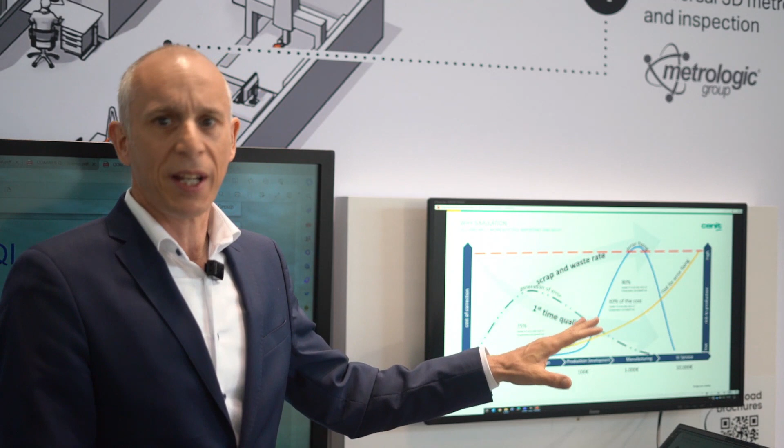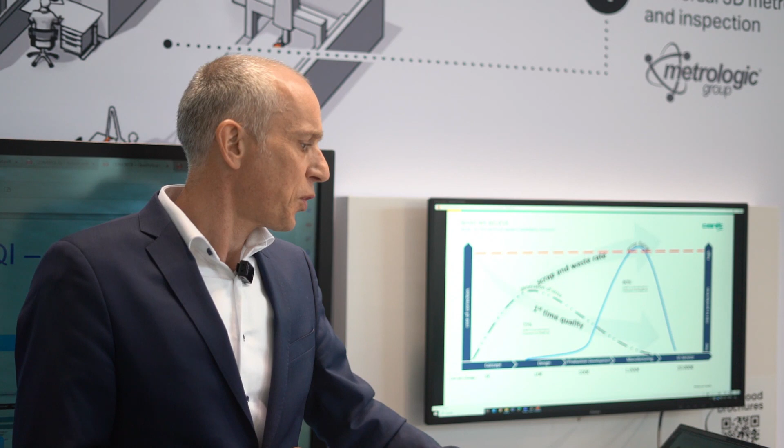And very often when we visit a customer, we find this situation here on the screen where they have a high risk in production due to a huge scrap and waste rate and low first time quality. And this mostly happens when the fixation starts at manufacturing. So how can we turn that around? The point is we have to start the production quite early, and the production I'm talking about is simulation. So therefore, we don't call it tolerance calculation, we call it a virtual or digital prototype.

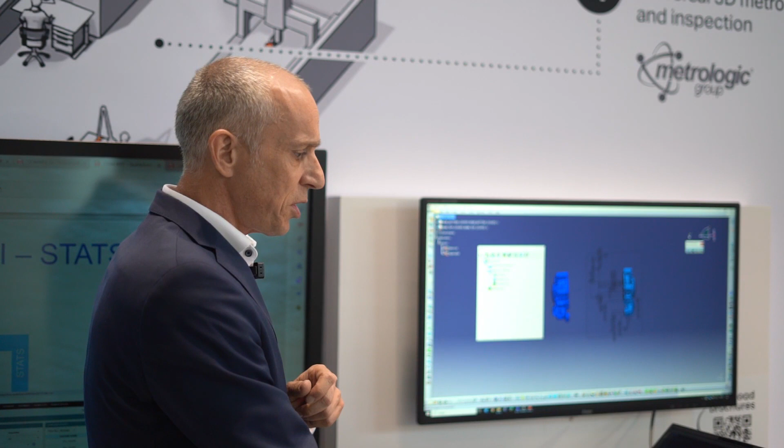Let's have a look at the digital prototype and how easy it is to set up such a simulation. So now we are in the CAD and we have our parts, and inside the parts we have the 3D PMI, but we also have the constraints. So just making one or two clicks to hand over all the things we already created within our CAD tool. So hand over the 3D PMI, but also how the part gets assembled by

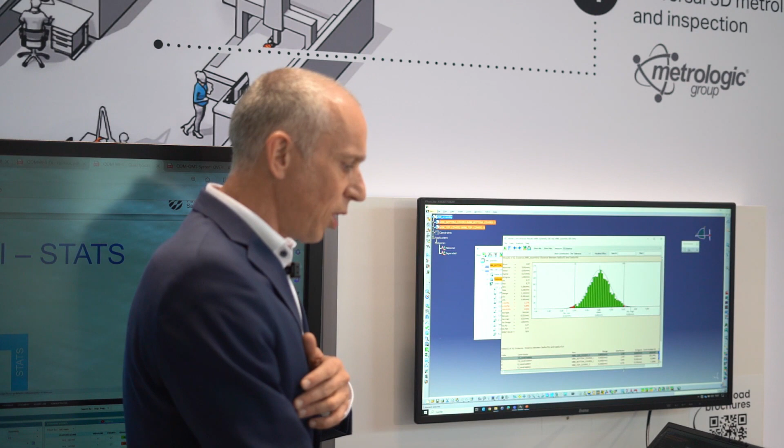the manufacturing. And now we just make a nominal build to assemble that and run the simulation to figure out if the design strategy, the tolerance strategy, the measurement strategy is exactly what we need to secure our quality expectations. And then probably we find out that on our measurement, let me go to the right one, we face some out of specification. And what we also find is what is guilty of that result. So what do we have to change? And it's just by a double click that we can change.

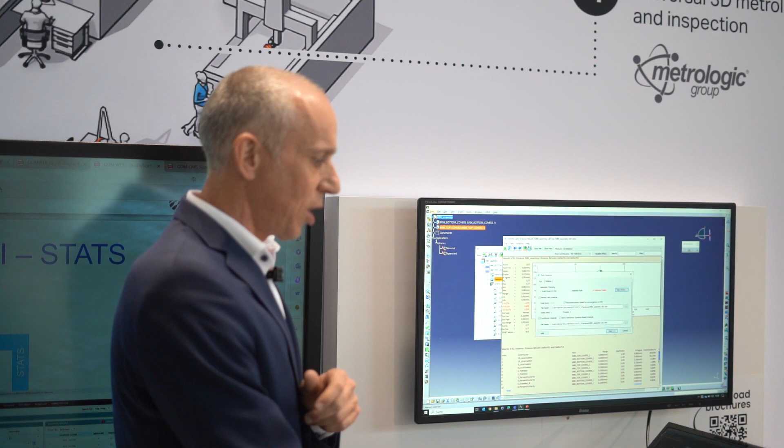So what is the normal behavior on the customer side? They get an idea, send it back, the tool will be changed. It takes weeks until you get the part back just to recognize, oh no, that's not the right direction, and you do it forever. And you can shorten that time dramatically to seconds, because as I said, I just make a double click and rerun the simulation, and then I compare to understand whether I am in the right direction or not. It takes just some seconds, and I understand if I am right or not.

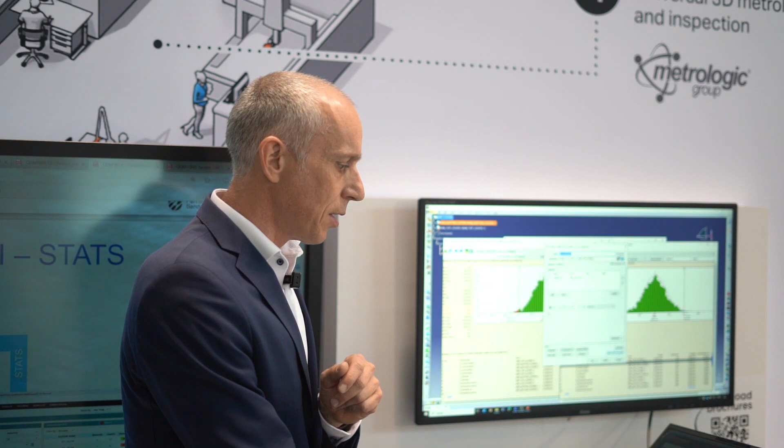And then I can push over that tolerance, and this tolerance will be moved to the 3D part and placed here. And when the tolerance is in the part, we can hand over to Planner X4 and go further for the measurement. And then the journey starts.

Okay, let's introduce you to the end-to-end process from Metrologic. We are here to visualize the Metrologic hub, and we are going to focus on the planner activity where the inspection plan will be produced to activate the different phases, step 2, 3, and 4. Some information can come from the CAD system directly from the design, and some can come from the 3DCS system. Let's see and discover what the planner is doing.

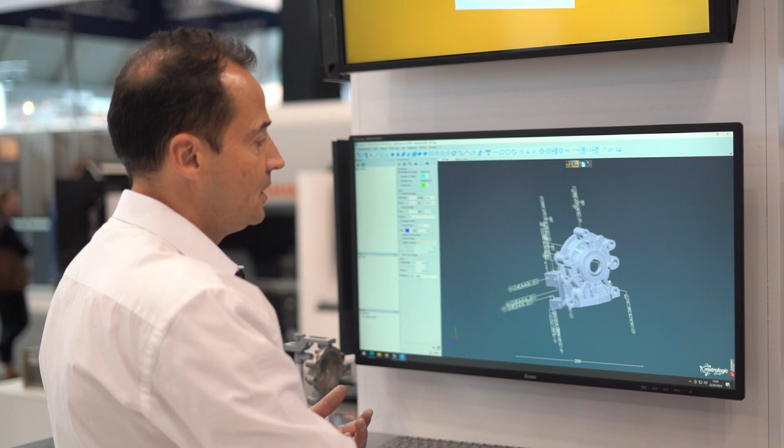So we open the environment, and we are here to define and receive the information from the design. So I'm going to open a CAD file. These CAD files can come from the design itself, from different CAD systems. And as you can see, it already has some information with the PMI information.

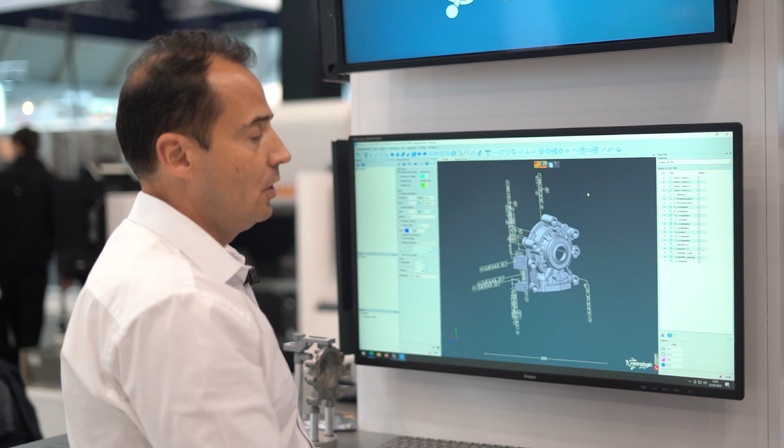So this is GD&T information that we can explore through different functionality, and we see here there are around 21 characteristics that the user is going to prepare in this phase. So according to the information we have on the CAD, we can use this kind of functionality that is going to explore the CAD and define all the features.

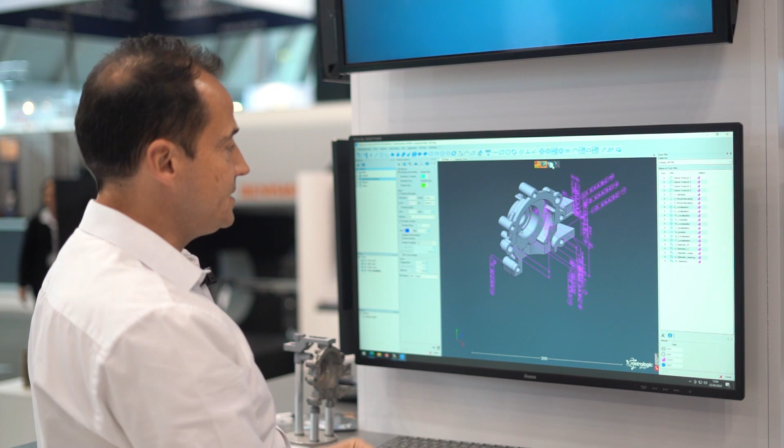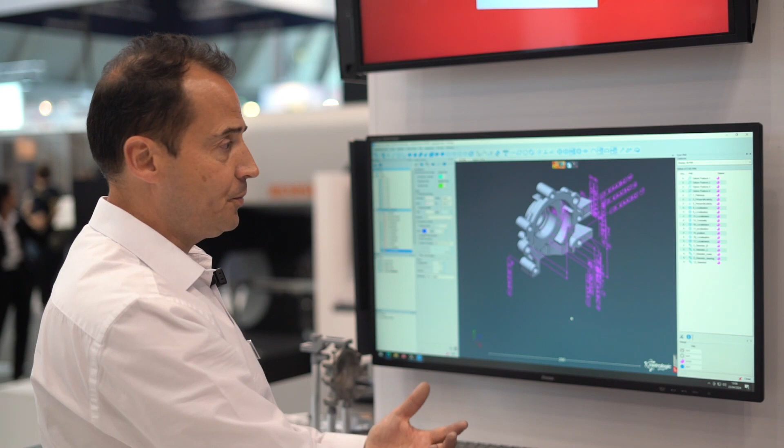So all the features are going to be extracted from the CAD with only one click like this, and we have prepared all the features coming from this kind of characteristic, the feature of cylinder or some other GD&T information that the customers would like to address. As you can see here, this characteristic is completely credible because they are fully semantic for the characteristics. Let's go now deeper, because in this phase of prepare, we already have our inspection plan.

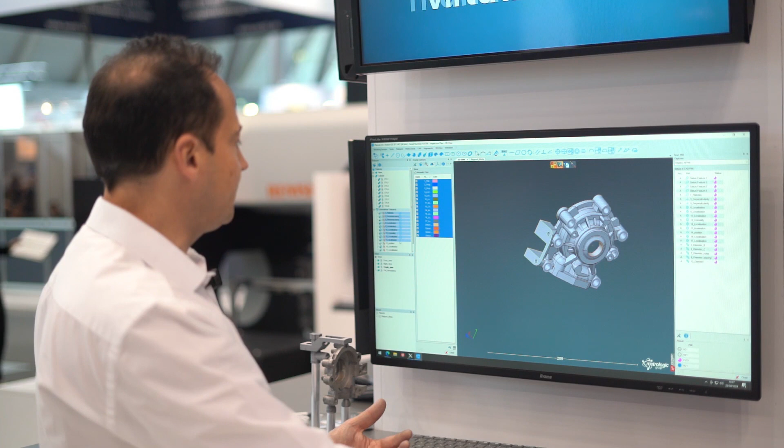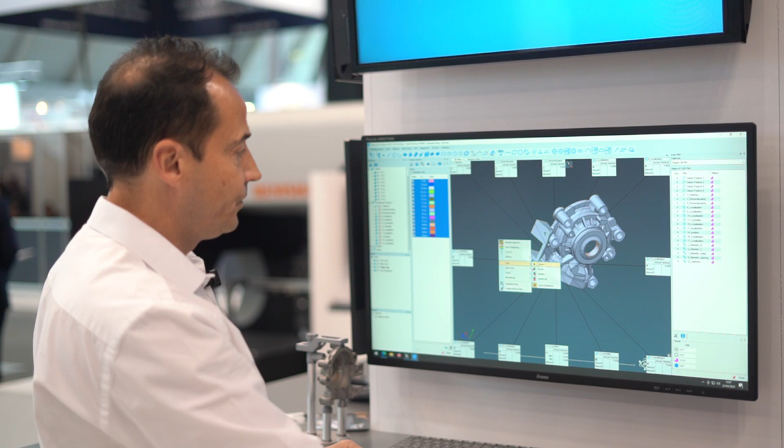This is all the features we have to measure, but we also have the capability to prepare some different views for the treatment of the information. Let me set a few parameters to explore the value, and maybe I can prepare a view by selecting my features, making a right click here, and I already prepare my view so that, when I receive the characteristics from the measuring and execution phase with inspection software, I will be able to store it, and I've got my view. Let's save this view. And I can recall this view according to the different applications, and of course I will get this view.

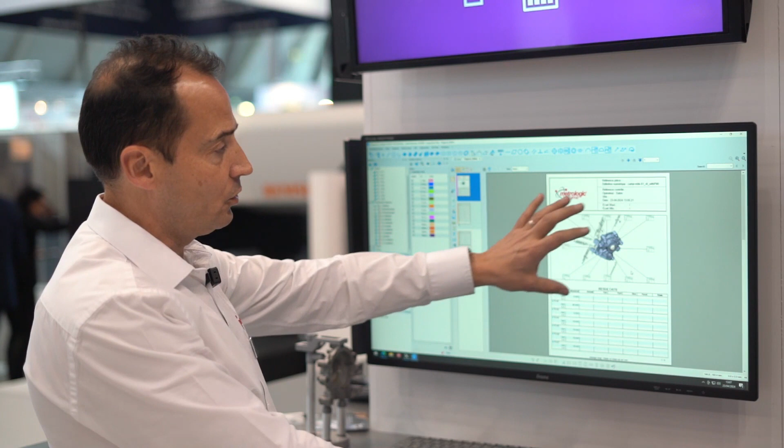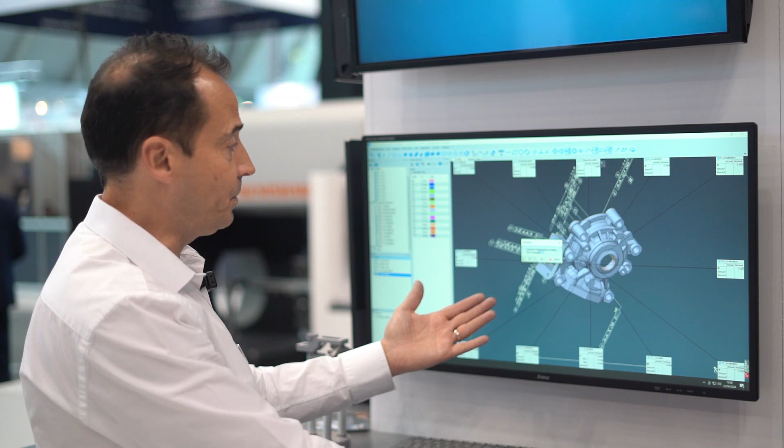Now the next step is to prepare my reports. It's automatically done because I received the view, I've got also the features, and if I go in my edited report, I already got the view with the stickers pre-placed with the different parameters, and I've got all the features I would like to measure. So everything now is saved, and I can now go to the step of preparation and programming with Silma. So I will just save my inspection plan somewhere on my desk or in my database, and then I finish, and we can go to the Silma phase.

So here, this is Silma, the offline simulation tool. Here you will be capable of recreating your environment in the simulation, what we call the digital twin. Here it's a CMM, but it can also be a robot, and we can also manage different technologies like tactile or optical sensors. Using Silma and its digital twin, you will be able to recreate the virtual cloud in order to anticipate the cloud you will have in reality. So it will help you prepare all the steps for the analysis offline, to reduce the downtime on the real cell, because the challenge is to stop the cell the minimum time in order not to stop the production.

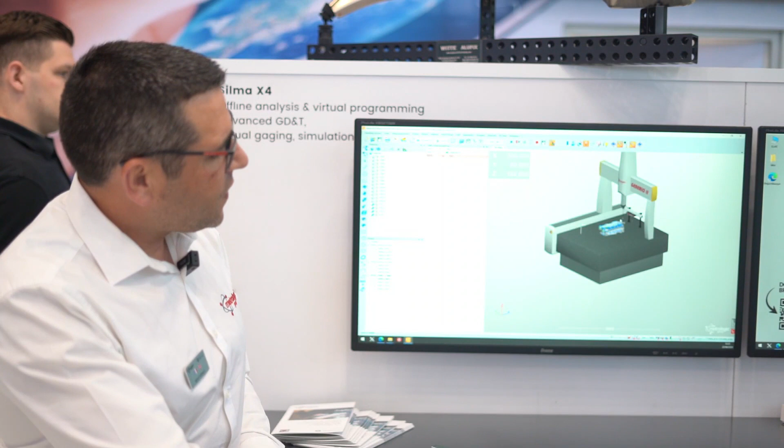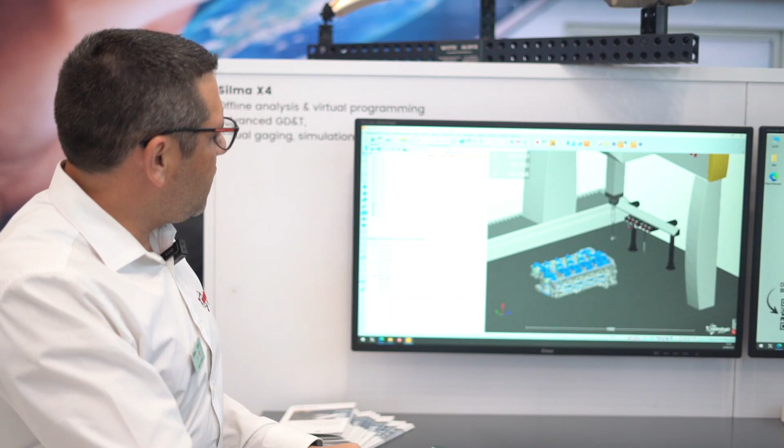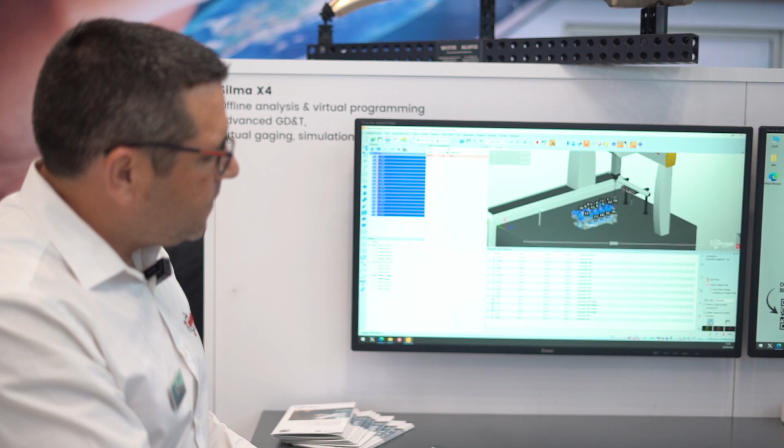You can see that we have our configuration. Here it's SP25 probes using a tool changer, but it can be different, any brand or any technology, because we are universal. And here we came into Silma with our inspection plan. This plan is coming from the prepare phase from Planner, and here we will reuse the same plan. So the next step is to create the part program. Thanks to Silma, you also have the possibility to use smart tools like inspection path planning. Using path planning, we will create in only a few clicks the whole part program with an optimized, collision-free path. The software will select for you the right tool to avoid any collision, and also the right head orientation, and optimize all the steps to have a good path and push it to production.

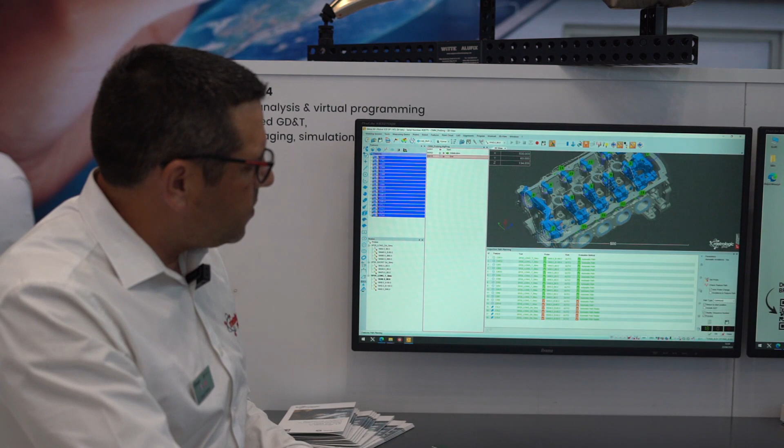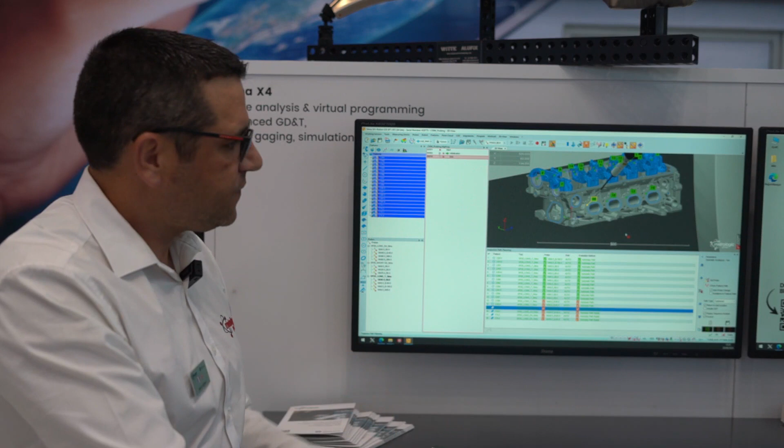So here at the end of the computing, you have a summary of what happened. For example, for this feature, the software decided to use this probe orientation. But for this feature inside here, since it is a tricky access, the system decided to use another tool. So you have a summary of which tool has been selected, which probe, the evaluation method, and whether there is a collision or not. When you validate this panel, you will see all the lines inside the program, and this program will be saved and sent to the next step, in Metrolog on the shop floor.

So we are on the Metrolog execution of the end-to-end process. It gives us the possibility to run the programs that have been learned from Silma. And voilà. The benefit of using Metrologic is that we are a universal solution and we can interface with every kind of system. Here, for example, behind me, we have the 5-axis system from Renishaw. Metrolog is connected to the I++ server of Renishaw, and the benefit we bring to this solution is a really good user experience thanks to our 40 years of experience in metrology.

For example, on this kind of solution of 5-axis or robot solution, it's difficult for the user to program because of the rotation and translation of the system. And what's the added value of Metrologic is to bring graphical tools and intelligent automatic path measurement to help the customer to exploit the maximum capability of this kind of solution.

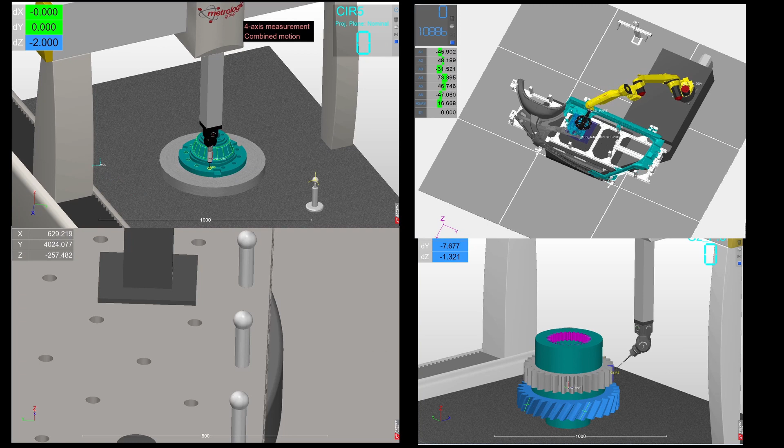Okay, so here is the new machine from DWFRITZ and Metrolog. It's the zero-touch machine. So the target of those machines is to inspect 100% of your parts. For years, industry decided to have automated cells, but one thing was missing: the inspection. So those machines are dedicated to inspect all your parts, 100% of parts. The technology used is a non-contact system. So it allows you to inspect family parts.

For brake discs, for instance, you can inspect the smallest brake disc to the big one without changing the configuration of the machine. Then the cycle time is really short, so we cope with production cycle time. For a brake disc, for instance, it's around 20 seconds to inspect one brake disc, dimensional and defect detection.

How does it work usually? The sensors, the laser light sensors, are able to extract point clouds, and the expertise of the company is to be able to calibrate all those sensors together and extract a full point cloud of the part. Usually people are used to having like 10,000 points, and with our solution you will get 18, maybe 20 million data points. Metrolog X4 was one of the software able to integrate those point clouds.

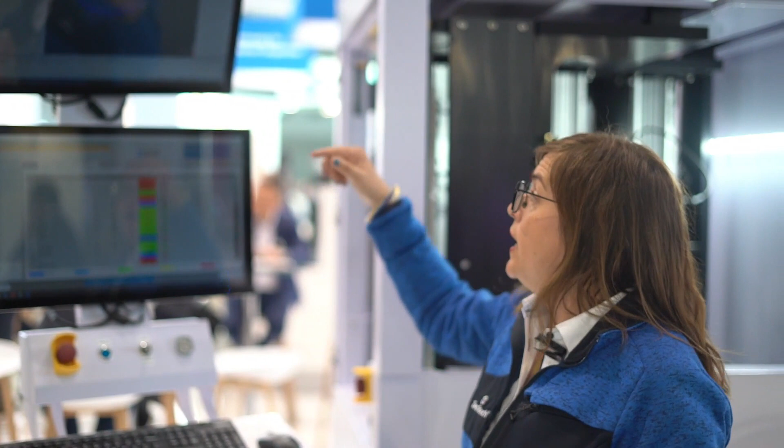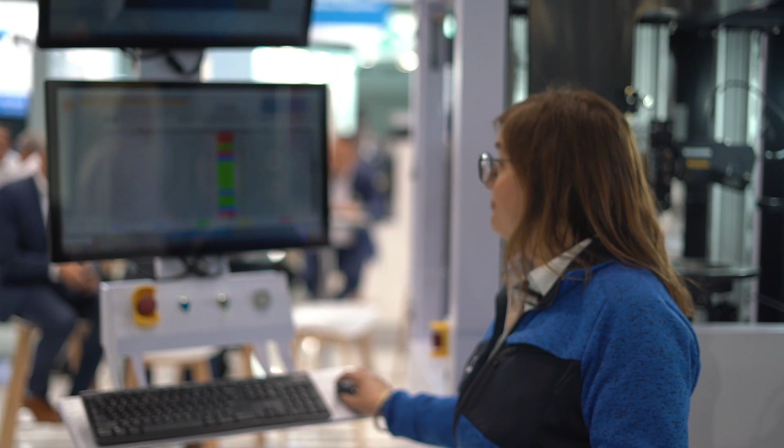So you can see here on the screen, you have the CAD model of the brake disc, and then we will integrate all the point clouds on the machine. Just here. So the scan here takes around 10 seconds to get the full point cloud, and then you will see on the screen that it will be integrated in Metrolog. Metrolog then will extract all the features that the customer needs.

The benefit of this is that you can do it from your desk. You don't have to stop the machine because it's a production machine, and then you integrate all the features directly in the machine. So you can see here on the screen that all the point clouds were integrated, like here. And then you will get all the data analysis just here. So once you have finished your execution operation, you will want to manage your results in order to manage your process. In order to do that, we will use our X4 iViewer solution.

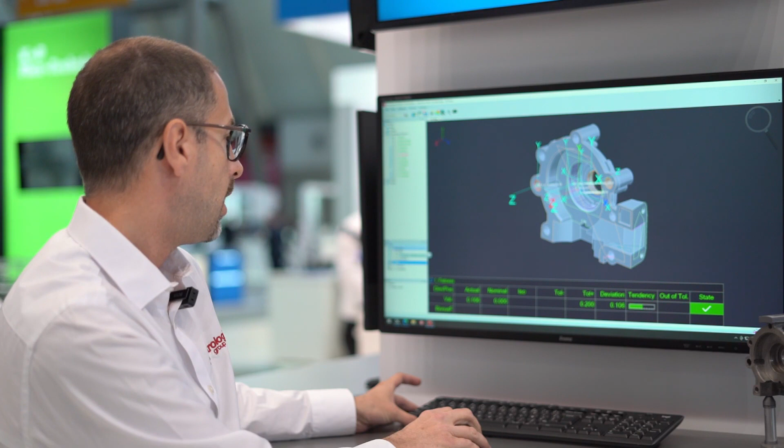With iViewer, you will be able to visualize in overview or in detail all your results coming from your just measured part on your device. Here is the global view you can have at the end of the execution. You can here have an overview of your results. You are able to retrieve all the defined views during all your inspection process.

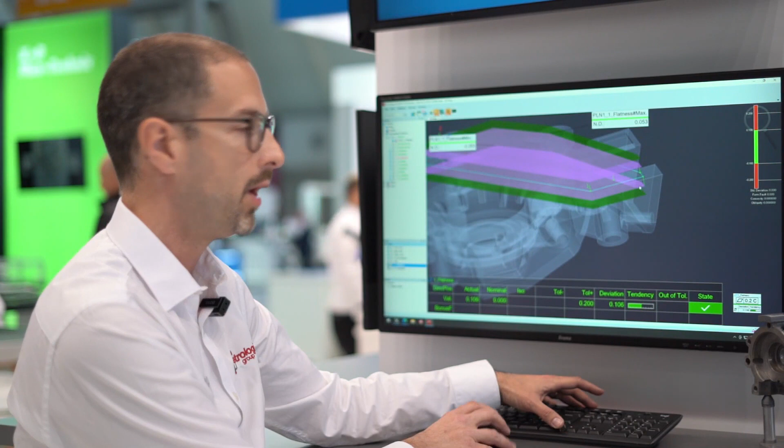You can look at the detail of your results in order to better understand what the issues are on your parts. You can, of course, use all our advanced detailed views and all the possibilities of analysis and display in order to make your analysis and better understand if your part is really good or if there are some issues during your production. We ensure the analysis of any kind of geometrical tolerances or distance and angle evaluation.

And you have the possibility to finish the setup of your inspection report in order to send it for printing or as a PDF file in order to share these results with, for example, your subcontractors. Once this analysis job is done, you are able to manage your process in order to correct your production and generate better parts. In the end, these results here are visualized with iViewer, but of course these results could be inspected through a statistical tool.

Hello everyone, here we are talking about QDM, the Quality Data Management System. It's an enterprise-wide QMS system where we start from digital transformation of all your digital assets within the company. We standardize it using a process standardization module, so all the quality engineers are looking at the data in the same format, in a meaningful decision-making format.

Then that allows us to monitor and control your quality within the whole enterprise of your manufacturing plant, and also allows for quality improvement using that quality monitored data for future quality metrics. All this is done with the centralized web-based portal called QDMWEB Gateway. Let me show you a little bit of the QDMWEB Gateway and the key features of the software.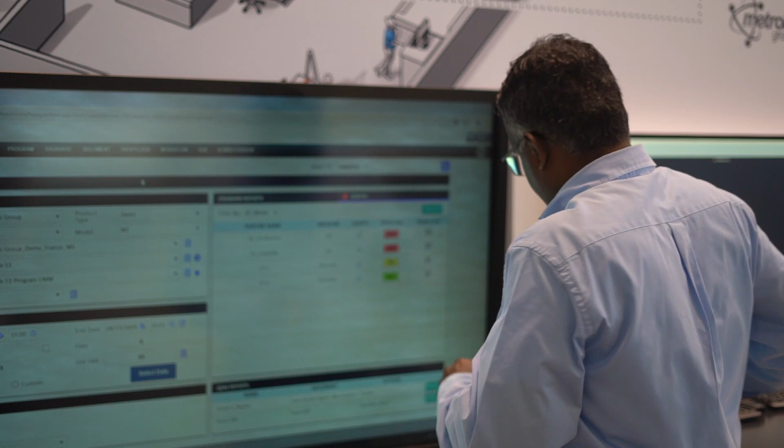Okay, so we're looking at the QDMWEB screen, where we're getting data from all these Metrology tools on the booth, directly sent to QDMWEB with a direct integration. And right now there are 43 samples, and we would like to quickly see a report for the last 10 samples. The system automatically generates a real-time report with CAD graphics, with leader lines pointing to where the measurements were taken, followed by SPC charts for all the metrics, real-time metrics. So all the quality engineers are looking at the data with a graphical SPC reporting format for all the parts and the bill of materials that's made within the organization.

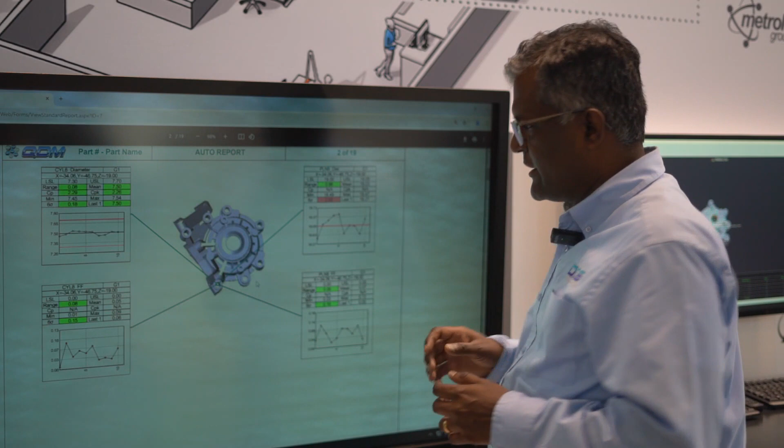The system also has an inbuilt quality collaboration platform, which allows the quality engineers to interact and collaborate within the QDMWEB system for all the quality problems and all the root causing. For example, in this particular case, there was a mean shift that happened, and the quality engineers put the system on monitor, and then another quality engineer went and fixed the process, and now the problem is resolved and the process is stable. All the quality collaborations of process corrections are stored within the system for future root causing and problem solving.

And the third component is a system-wide management dashboard that's integrated within the platform, allowing you to look at your entire company on one screen where all the data is coming from. In this particular case, it's the Control show. All the data that's coming from the show is rolled up, so you can get quality metrics at a system level, at a plant level, at a program level, and at the supplier level.

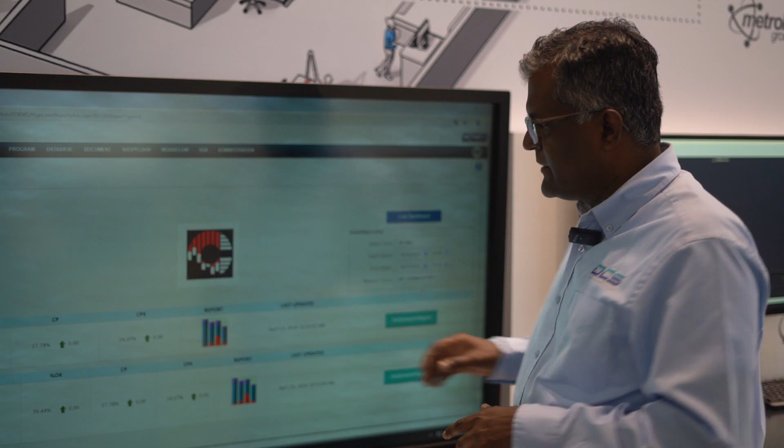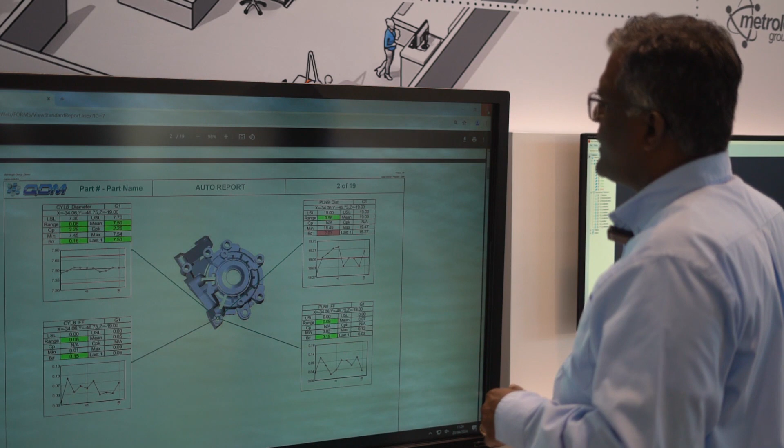And drilling down one level at a time, it takes you to the part level, look at your part quality, and from here go to the entire part quality report. So the system has the mechanism to go from a system-wide dashboard all the way to an individual part and its SPC. So these are the overall key functionalities within the system and the key benefits of having a centralized web-based portal to look at your quality data.

So at the show, we're launching our QDMWEB QI system, the QDMWEB Quality Intelligence System. The main additions from our old QDMWEB to the QDMWEB QI are 4 new frameworks. One is a collaboration network, so quality engineers can collaborate on any quality related activities within the QDMWEB system. We also have a product for scan data analysis to take all the data coming from scan systems and scan reports, integrate that into our systems and provide an easy to use kiosk. We are also adding a platform for data entry portals for data coming from the shop floor from all the manual interfaces, and also another system for live dashboards. So with these 4 new platforms, we are taking our system into a quality intelligence platform, which will be the stepping stone for the AI platform that's coming in a year. So let me walk you through.

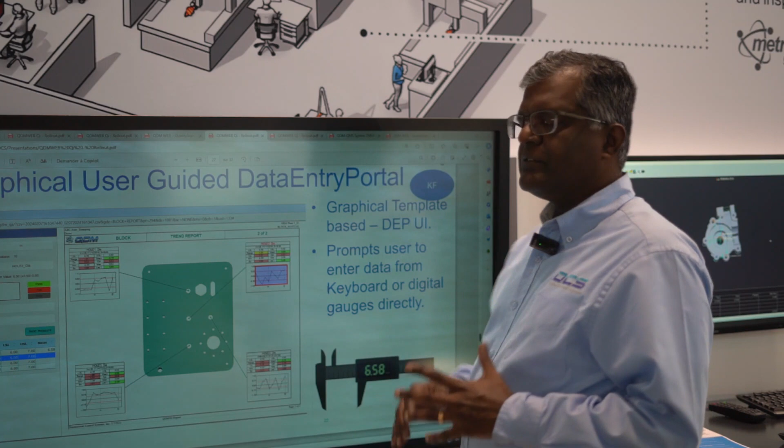The quality collaboration is done using a system called QNotes, which allows users to create quality notes throughout the system for different interactions and to communicate with other quality stakeholders. The quality scan is an ability to take in scan data and quality reports into our QDMWEB system and provide an easy to use kiosk to very quickly navigate and look at all your system quality data in one centralized portal. We are also adding data entry portals within the shop floor. So for any manual data that's entered, we provide a graphical template-based interface to load that data using a user-guided system as part of the QDMWEB QI platform.

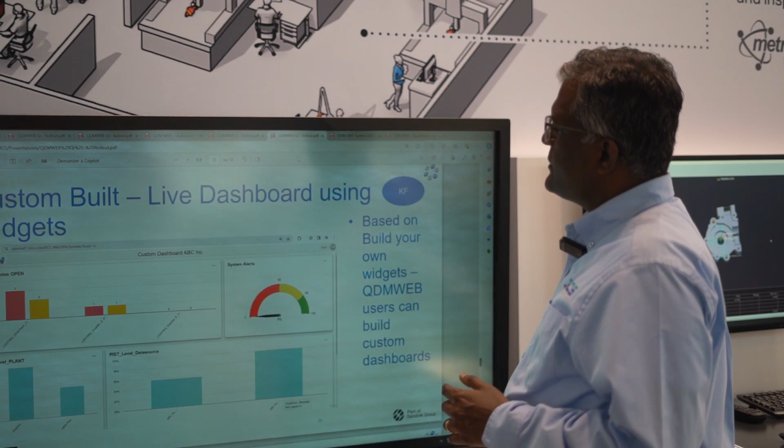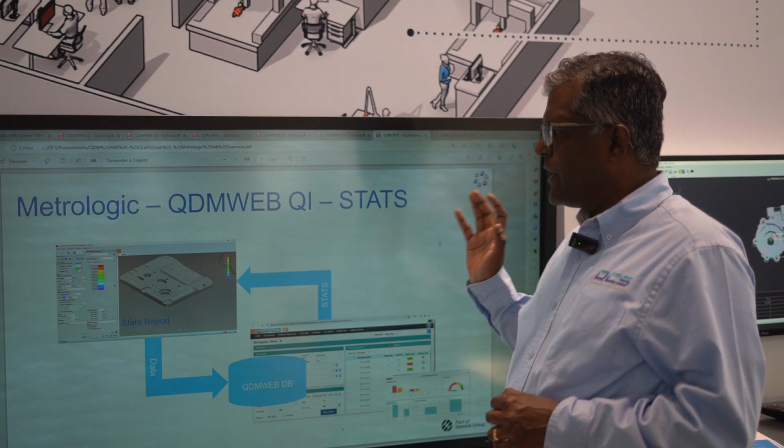The QDMWEB QI platform also has live dashboards that could be set up anywhere within the plant for quality engineers to monitor the quality of the products in a live dashboard mode, and it's customizable by the user. So these are the four topics that benefit the customer, and it's unique in the market to provide you with a quality intelligence platform. So here at the Control Show in 2024, we are showcasing our product, QDMWEB QI, integrated directly with Metrologic products.

What we are demonstrating here is all these devices, Metrologic tools running on the inspection devices, collecting data. As soon as the data is collected, it's directly loaded onto the QDMWEB system before the program is completed. So the system can live monitor all the data, and as soon as any SPC alerts are triggered, it can send out email alerts to the stakeholders. So with this integrated system, email alerts become real time, and systems can be monitored as they are measured on the Metrologic tools. We are also demonstrating another interface component where data collected in QDMWEB provides SPC analysis, and that SPC analysis is fed back to the Metrologic viewers. So Metrologic viewer can get access to QDM data and provide SPC results to the customers.